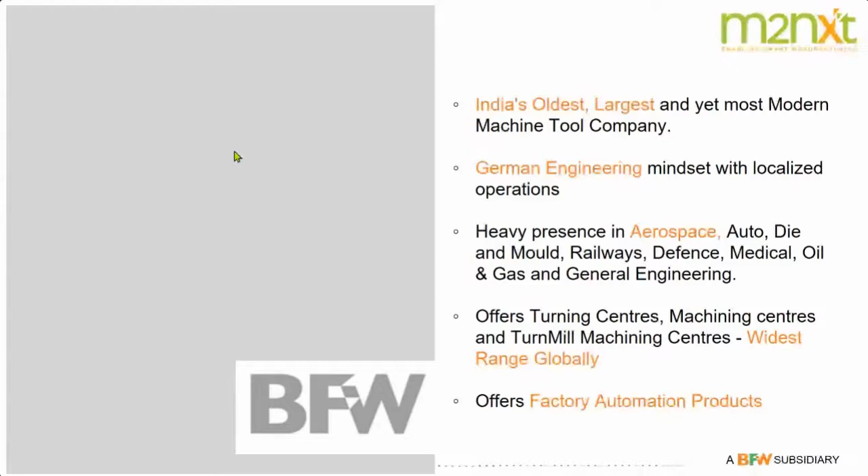We also have started offering factory automation products, which we are going to see today. So what is this M2 NXT, which is enabling smart manufacturing? It's a fully owned subsidiary of BFW focused on Industry 4.0 solutions, offering digital transformation, automation, additive manufacturing, and so on. So the name coined M2 NXT means any equipment on the shop floor which is producing needs to go to the next level in terms of emanating the data from there and see how do we improve the deployed efficiency of that machine or the equipment on the shop floor.

So that is how we said machine to next level, which means that it is machine to next. Short form is M2 NXT. So we simply said any equipment on the shop floor, when we drive it to the next level, it becomes machine to next level. So that is how we coined the name M2 NXT, which we call it as M2 Next.

So what is this Tech Talk? It is a leadership thought platform for bringing the best of technological solutions to the manufacturing fraternity, share knowledge and enable their progress, help connect with the industry thought leaders so that we can start discussing on how do we start working on this subject. So let us take a quick recap on the industrial revolution.

Industry, as most of you will be knowing, but I still would like to give a larger benefit for all the audience, over 800 plus who are present here. 1.0 was purely application of steam power.

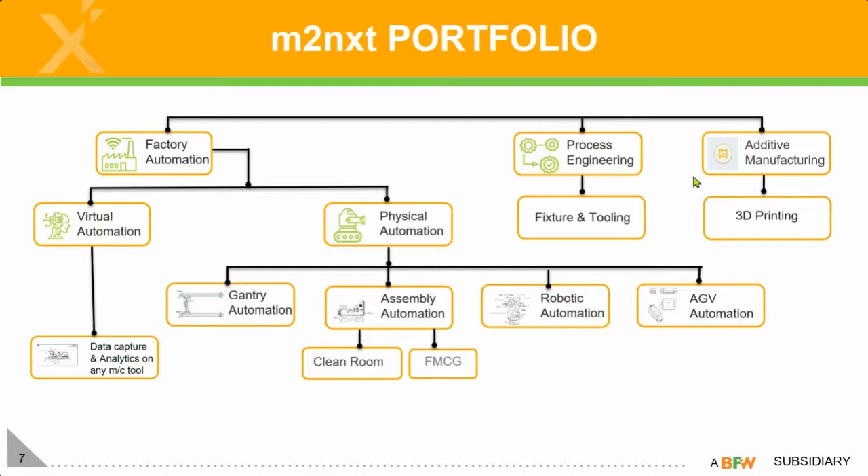So let us start looking at this subject one by one. Now, before going there, let's look at the deliverable capability of M2 Next—you need to have a good team here.

We have a committed team of 50 qualified and experienced professionals in the field of IoT, hardware, software, data analytics, robotics, gantry, assembly, automation, and AGV. We are continuously training them on the latest technologies in all the above fields. We also have professionals for design of automation systems, fixture and tooling, IoT solutions, and 3D printing.

We also have design software like SolidWorks and AutoCAD, and robot simulation software, namely Robot Studio and MotoSim. We have a dedicated project management and execution team consisting of experts for robot, AGV, PLC, IoT, fixture and tooling, and 3D applications. We have a shop floor of 2,000 square meters where project integration, trials, and PDI can be carried out. We also have a tool room facility with necessary machinery.

So this is the team. Unless you have a team in place, it is not possible to deliver the kind of technology we are talking about. So now let's first look at virtual automation—what exactly is the offering with respect to Industry 4.0?

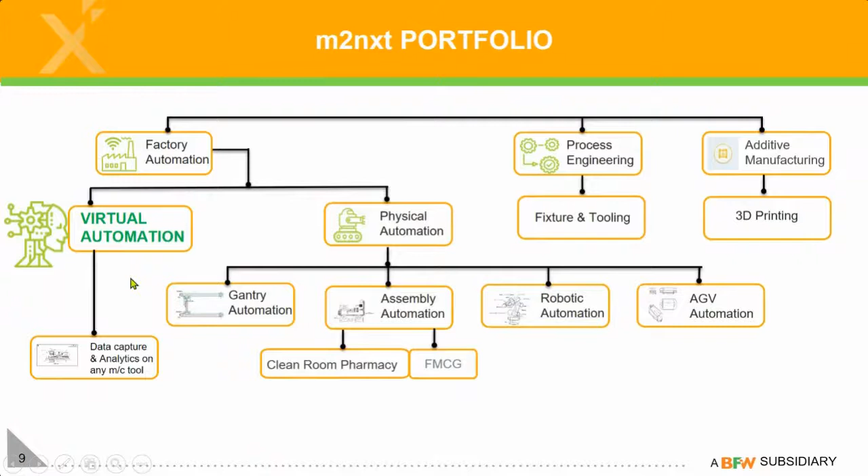We have designed and developed a device called IRIS, which stands for Intelligent, Reliable, Innovative, Seamless. This is a homegrown device which we started in the year 2017 under the Government of India R&D scheme, in the name of Dr.

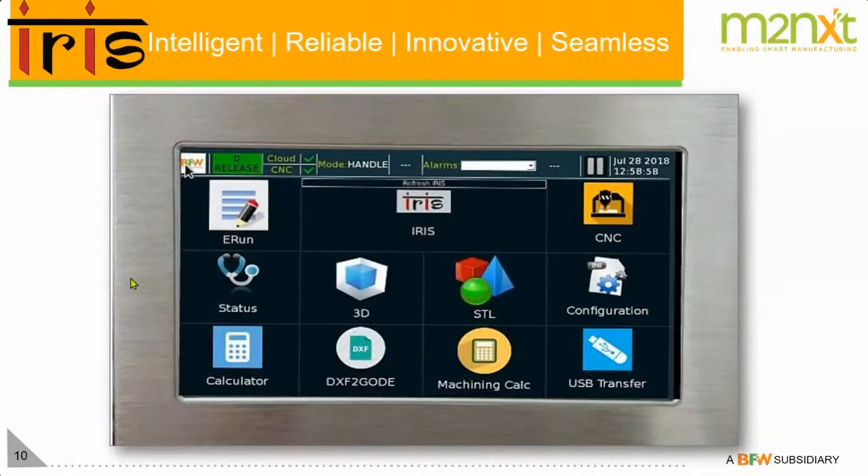At APJ Abdul Kalam Technology Center, we started working on hardware and software, where we have in-house designed this device, which has two variants. The first variant is called IRIS with HMI, which is IP64 compliant in the front and IP20 on the rear, wall mounted with every CNC machine, connected to the CNC controller with a multi-touch screen of 7-inch, 10.1 inch, 15 inch and 21 inch. It has a specification of 4 GB RAM, solid state device of 32 GB, extendable up to 128 GB, with dual Ethernet ports.

We also have a simpler device called IRIS Mini, which is IP20 grade with specifications of 512 MB RAM, solid state device with 4 GB, and dual Ethernet port. Every device like this will go with every equipment, and it will start acquiring data from that equipment and giving reports based on the performance of that equipment.

So let us look at the transactional architecture of this device. The first thing is that this device is not just a passive device like what you see in the market, which just acquires data and starts transmitting it. This device is an intelligent, active device. It not only acquires data, it does data processing, and then data transfer, which means it's an edge computing device that does a lot of processing within its edge process while communicating with the CNC.

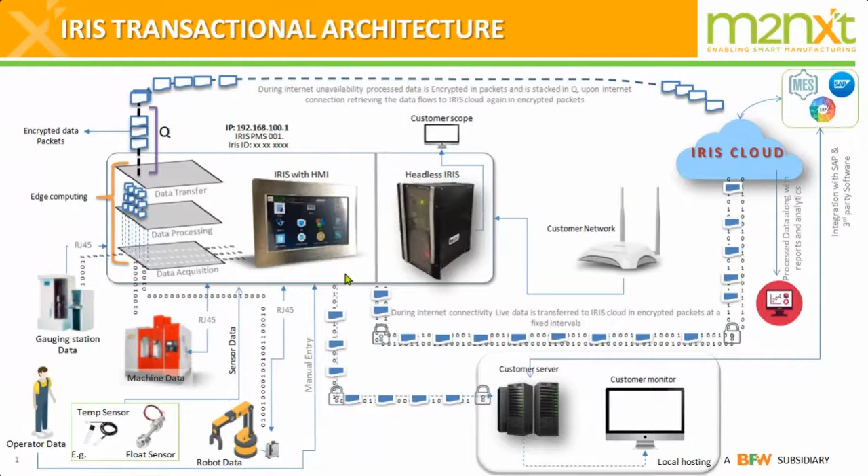So this is the overall architecture. Now let us look at the overview - what are all the modules which this device has got on the shop floor?

The first one is the production management system. The second standard vertical is maintenance management. The third standard vertical is health monitoring. Fourth is the operation management vertical. The fifth is a customized module, which we call data analytics, which is customized to suit the needs of every organization or institution.

Now let us start looking at each one of them, what exactly we have to offer. In production management system, it has got everything to do with production planning. So let us look at how to manage the production plan.

The planner will start making the plan based on the orders received from sales or marketing, for every equipment, for every part, with respect to the setup and the machine. He will go on making the plan - you can see in which plant, what shift, what part, on what setup, with the machine serial number, the work order number has to be established. So he will start making the plan based on the date, the shift, and the number of components.

One can start looking at the plan versus production dynamically on the shop floor for a given machine, which can be dialed or queried from start time to end time, where we see in shift 2, for a work order number on 10th July, from 23rd night 11:30 to morning 7:30.

What was the part name and setup name, what was the target and what was the actual number produced, and how many were okay - in the sense that if there was an automatic gauging station connected to the machine, we can also track the component quality. And what was the target cycle duration and what is the actual cycle duration of this particular machine with respect to the component can be clearly tracked.

Like this, you can start tracking every machine, every shift, every part. And dynamically, you can get to know whether the production plan versus the actual production is in line with the actual desire or not.

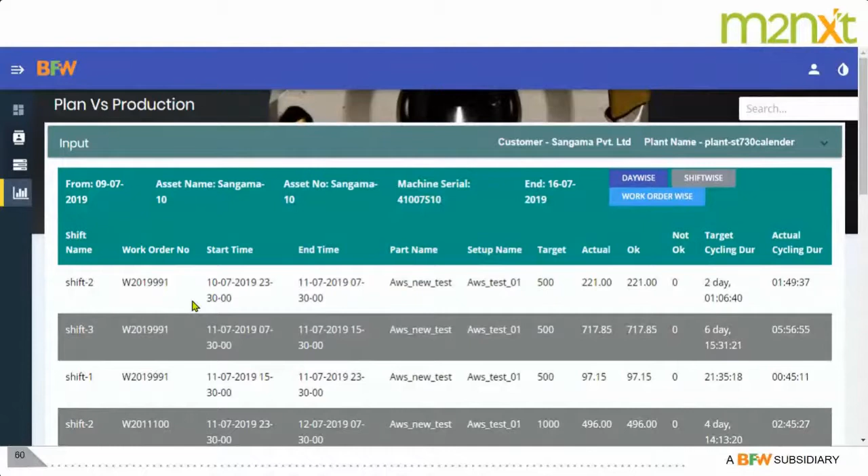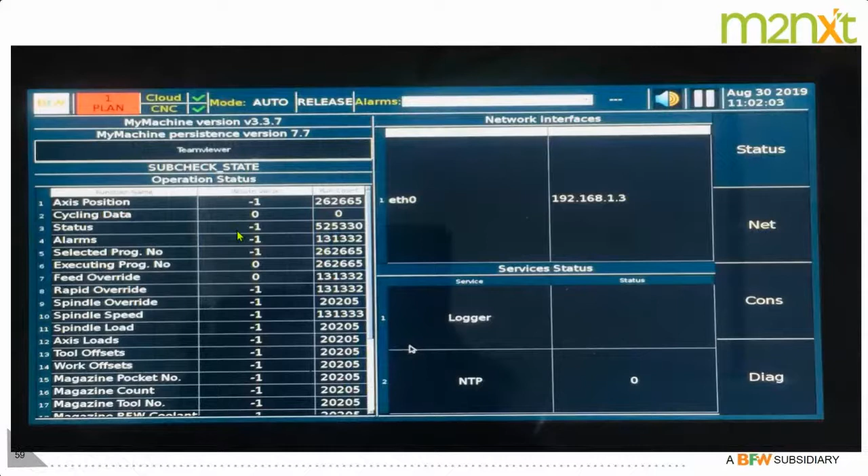You can also look at the live status of every machine on your remote device like a smartphone, mobile, tablet, or laptop, where you can see whether the machine is connected to the cloud and connected to the CNC, in what mode the machine is running - auto mode or manual mode. All the control releases are there, what are the alarms, and what is the real-time date and time.

And what all data is being accessed by the iris with respect to the CNC can be seen, which shows the live status of the machine.

Here you can also dynamically look at the computation of overall equipment efficiency - what was the availability of the machine, what is the performance of the machine, and what is the quality. This essentially means there were no problems on the machine, no issues with consumables, which determines the availability. Performance is when the machine is running with no issues. So if performance and availability are 100%, and quality is 100%, based on these three parameters, you calculate the OEE of the equipment.

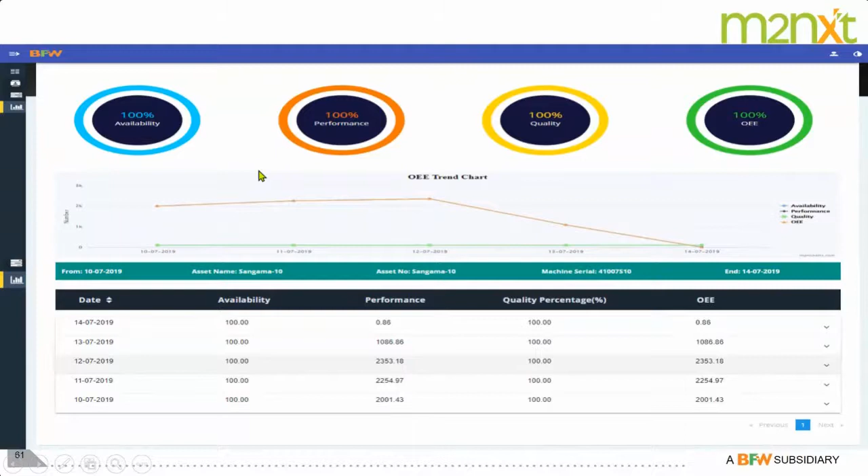So when you have something like 70-80% OEE, you can go back and look from the perspective of availability, performance, and quality, whether there was any shortcoming and how to overcome that. Now, next, let us look at the quality control data.

You can look at every work order number with the number of components you have produced. You can view the quality control status with respect to the parameters: what was checked on the gauging station, what was the result of those, and whether those were very close or well within the limits can be viewed dynamically as and when you produce the component, in the event that the gauging station is connected to either the CNC or the IRIS.

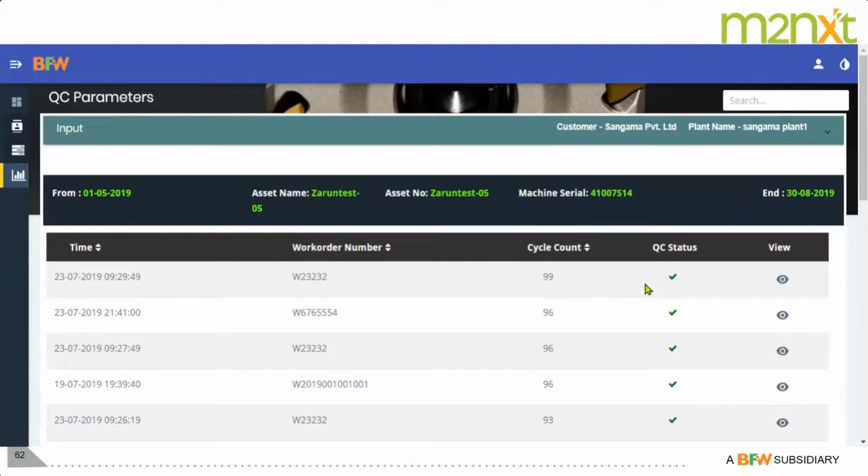One can also look at the feed axis override of the CNC machine status with respect to the part, the date, the shift and the time running for the query, where sometimes the operator can run the machine with the feed axis override above 100% and hence produce the component faster.

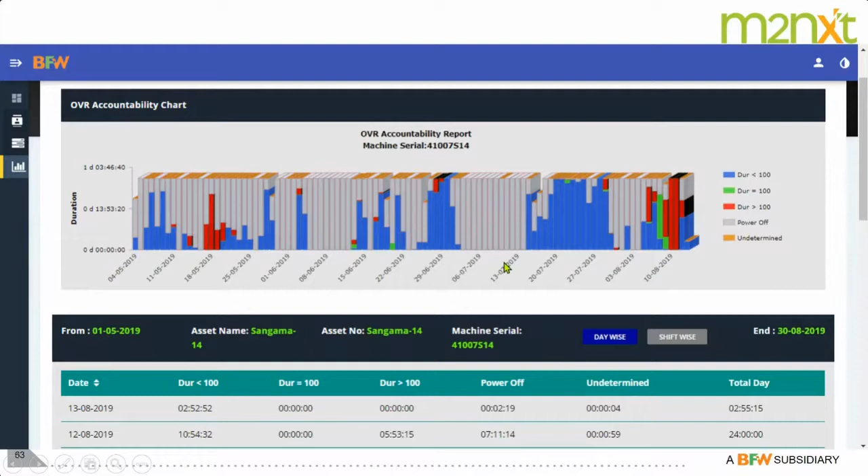So you can start looking at those kinds of traits: if it is blue, it is below 100%. If it is red, it is above 100%. If it is green, it is exactly equal to 100%. And if it is gray, the machine has not produced; it was a power off condition. If the machine is ready and not running and the operator has not intervened for any of the triggers, it becomes undetermined. So like this, you can start tracking the feed axis override status of the machine dynamically on a continuous basis. Now, next we come to the maintenance management module.

So one can start looking at why there were 49 breakdowns, and how many of them were chronic breakdowns can be evaluated. Once you evaluate these chronic breakdowns, you can eliminate them and make the mean time between failure longer, which essentially means that the machine is available for cutting, more productivity. And if you reduce the average time to repair from 1 hour 17 minutes to say 45 minutes, you get 30 minutes on each instance. So 49 breakdowns times 30 minutes is the productivity availability of the machine, and hence the output of the machine can be increased without having to do anything.

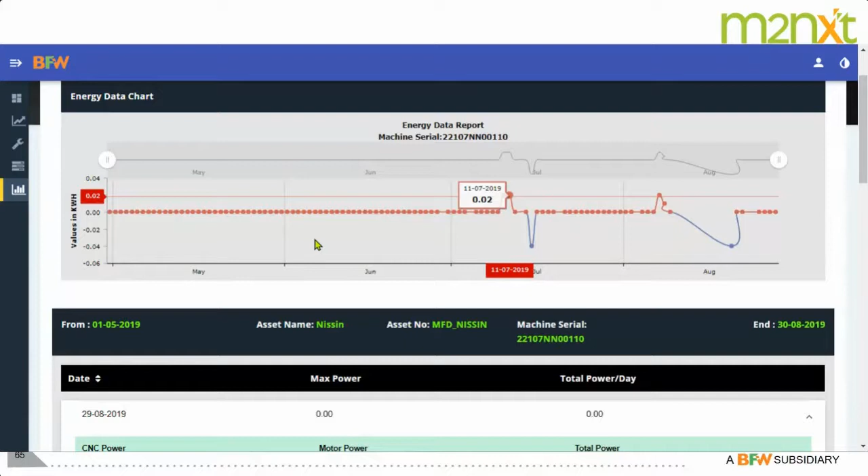Hence, your threshold can come down, and your per unit kilowatt hour pricing also can be revised downwards by looking at how we reduce the power consumption of the equipment on the shop floor.

Now the consumable could be a part, it could be a tool, it could be lubricant, it could be coolant, it could be machine cleaning, it could be anything on the machine which is a consumable. So one can track this, and once you have a waiting time, you can analyze and see how concurrently you can plan this material to be available at the machine so that the machine doesn't wait for the consumable.

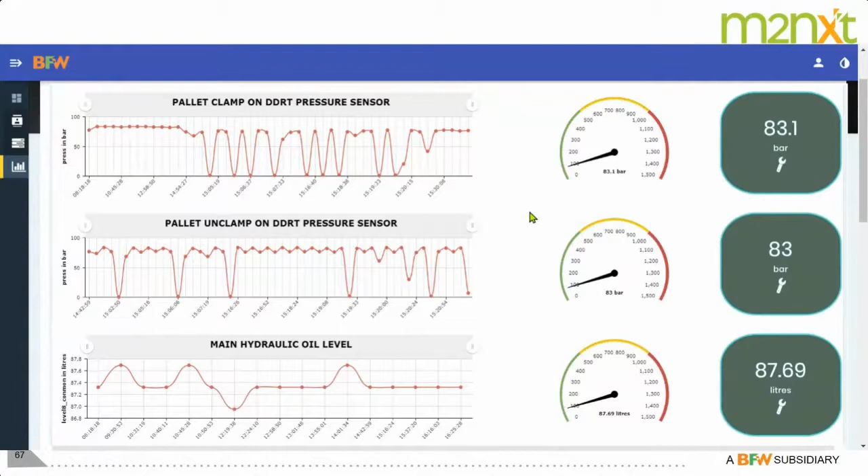Now, we can also look at the machine life and condition monitoring in terms of a dashboard kind of a display where it shows all the sensor and oil levels, which is green, yellow, and red, which shows that if you are in the green zone, you are very safe. So this can be pictorially driven on the dashboard, and this also can be viewed remotely on your mobile or laptop.

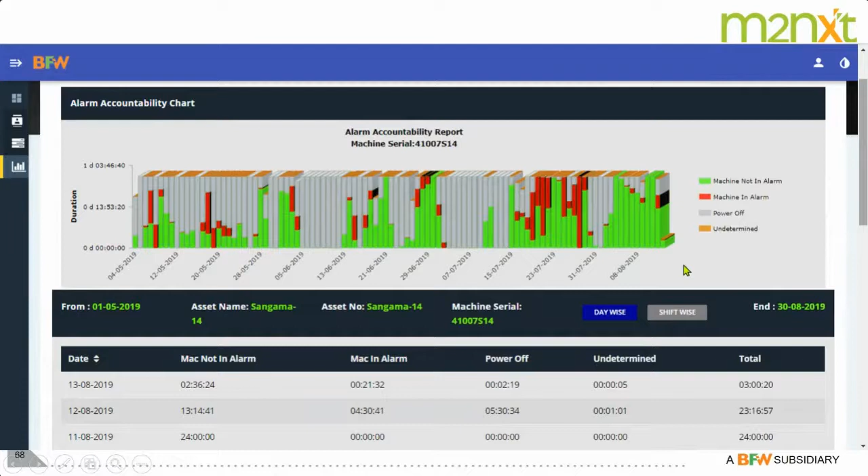Now we next come to the health monitoring system, which is a third vertical, wherein we start tracking the mechanical parameters of the machine too with respect to its performance. So this is a very unique feature which we have done, where the majority of the IoT devices available in the country and the world are only tracking the electronic part of monitoring, and the mechanical parameters are not so easily monitored. Here we are doing it with respect to its usage.

So the first trait is the spindle cartridge, where with respect to the spindle on and off duration in minutes, we track the performance of the spindle by setting the total life of the spindle, and we give a pre-warn condition. If the spindle has a life of 30,000 hours, every 3,000 hours we want to open the spindle and check for bearing wear out, cartridge wear out or the spindle behavior. We can set a pre-warn with the total life, and with respect to spindle on and off, IRIS tracks this from the CNC, and when you reach 3,000 hours, the machine stops.

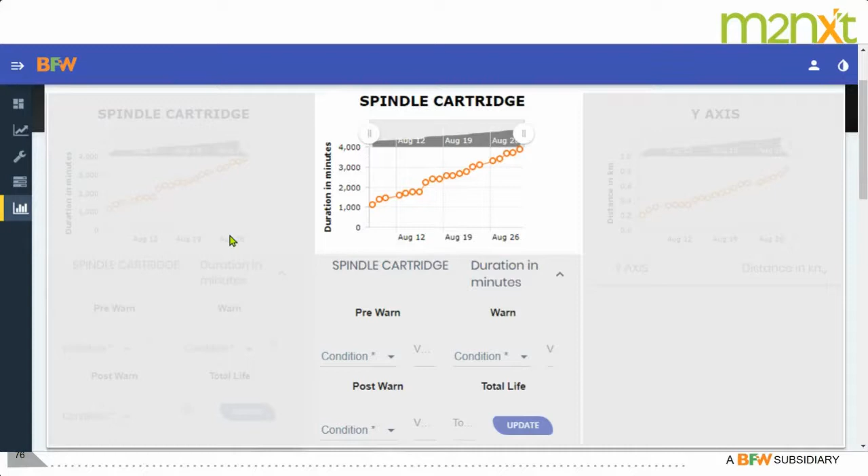One can also look at the ball screw conditions of all the three axes on the machine, X, Y, and Z axis, wherein we give total life and a pre-warn in distance in kilometers moved by the ball screw with respect to time, which again is tracked in real time through the CNC trigger of feed axis or rapid axis movement commanded by the CNC. And based on the pre-warn condition, the machine will stop and maintenance personnel can open and look at the condition of the ball screw with respect to its performance.

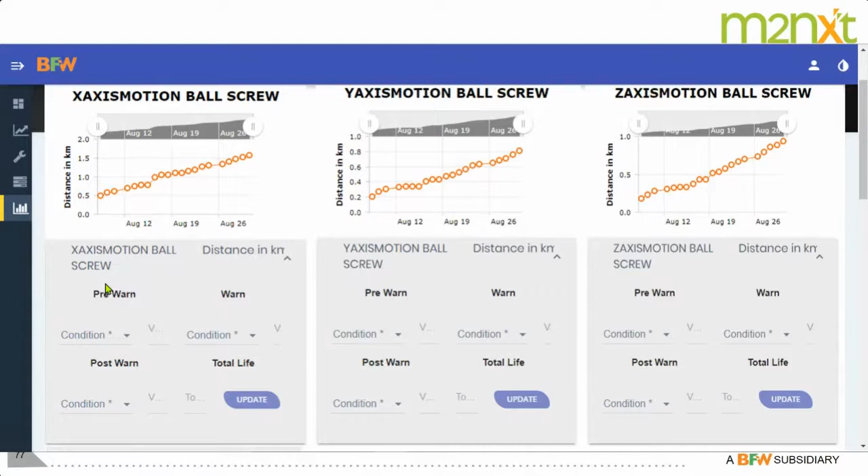So you can go to as many axes as possible on the machine, as IRIS can track the number of axes based on the machine configuration. Similarly, we can also look at the LM guide rails on the machine for wear, like the ball screw, with respect to distance in kilometers and time. You can see the condition of the LM rails of the machine.

One can also look at the hydraulic motor or the induction motor performance based on duration in minutes with respect to time.

It could be a coolant motor, a lubrication motor, a power pack motor, or a chip conveyor motor, depending upon S1 duty, S2 duty, S3 and S4 duty. One can clock the motor's actual running, and based on the time completion, we can stop and check not only the impedance of the motor, but also the actual load, the bearing and so on and so forth.

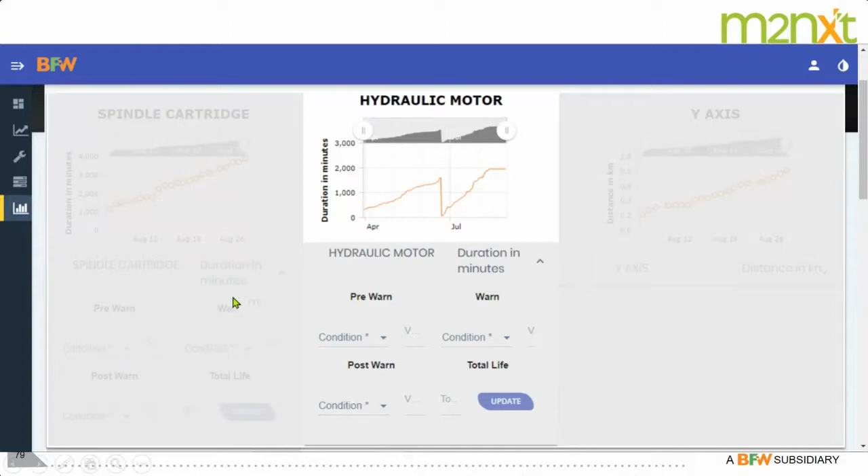We can also track the ATC, the automatic tool changer life of the machining center, like horizontal and vertical machining centers, based on the counts with respect to time. If you have a total life set as 300,000 or 400,000 counts, you can set 10,000 as a pre-warn, and you can open the automatic tool changer and look at the lubrication grease condition. You can look for the cam springs. You can look for cam wear out. A lot of mechanical elements on the ATC to see whether they are normal or abnormal.

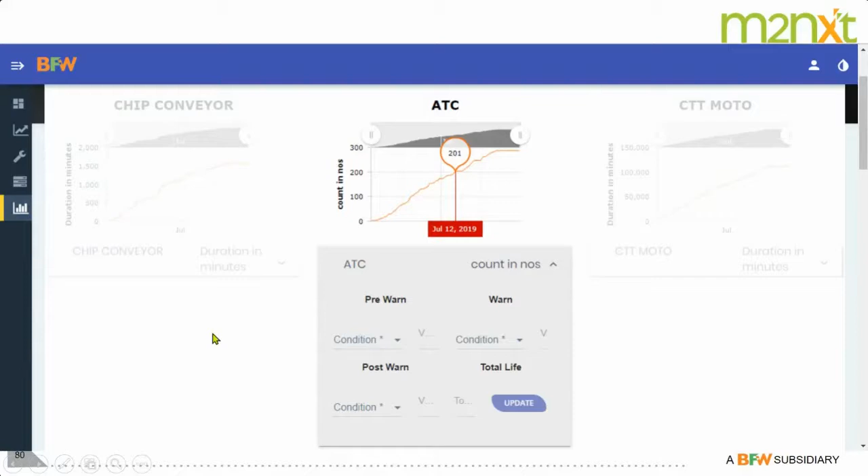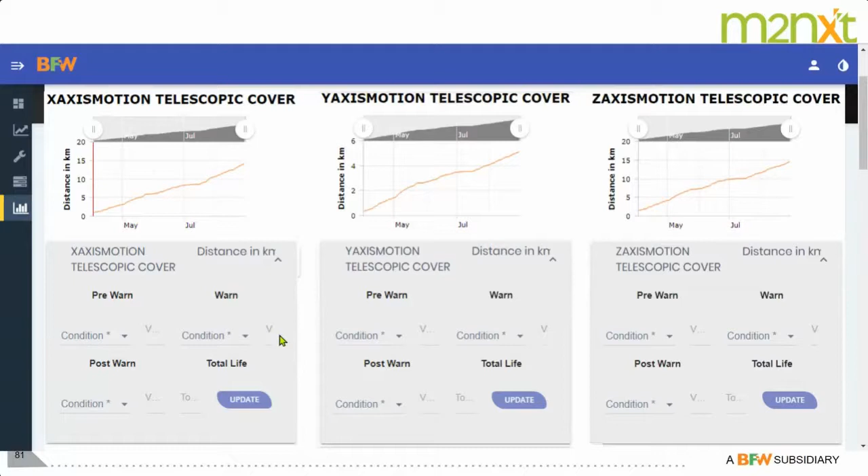Similarly, you can also look at the 3-axis telescopic cover condition of the machine tool with respect to the axis, where we track distance in kilometers with respect to time. Now, the fourth vertical is the one which brings in digitalization and digital transformation on the shop floor, which is the operation management system, which is very important in terms of achieving Industry 4.0.

So the first feature is on-device manual and drawings. Because the system has large memory, you can store all your instruction manuals, all your circuit diagrams, your work instructions, your bill of material, the vendor details, the machine details, the machine configuration, including the inspection and the SQC and SPC sheets in the form of images. And whatever is pertinent to that machine can be stored on the

IRIS. You can start referring to these documents without having to leave the machine by running into the design office and maintenance office, searching for those documents, which are very difficult to trace if you have 150, 200 machines, and the time taken to do so in the eventuality of a failure is very, very long. So here you can give a search command and start looking for those documents.

You can make a clear organization of how the mapping has to be done, so that at every machine, when you search for a document, you know the exact location based on the tree format that can be designed and developed. So here all the manuals, all the documents can be stored. Hence it becomes a paperless factory.

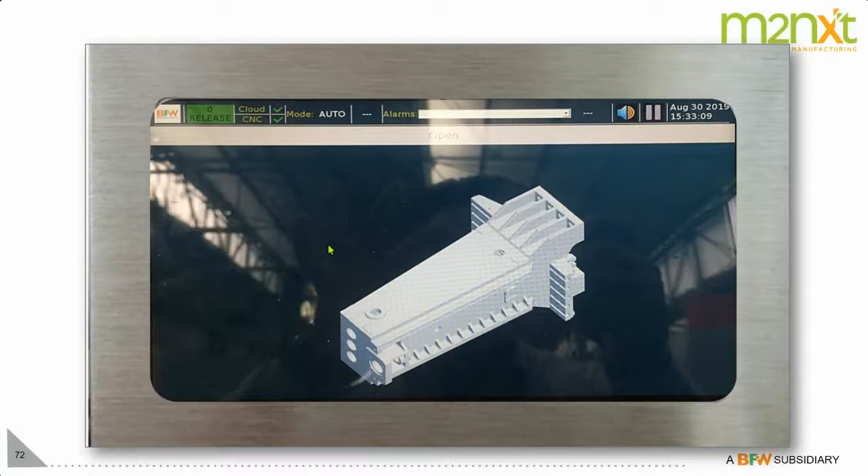Number two, you can also look at the 3D part drawing of parts incoming into the machine and outgoing from the machine, with respect to the control parameters, the contour parameters, the inspection parameters. You can upload it whether it is in Unigraphics, SolidWorks, AutoCAD, whatever software you're using. And since it is a touch screen, you can rotate the object to see it upside down or see the backside of the object. So all this can be done.

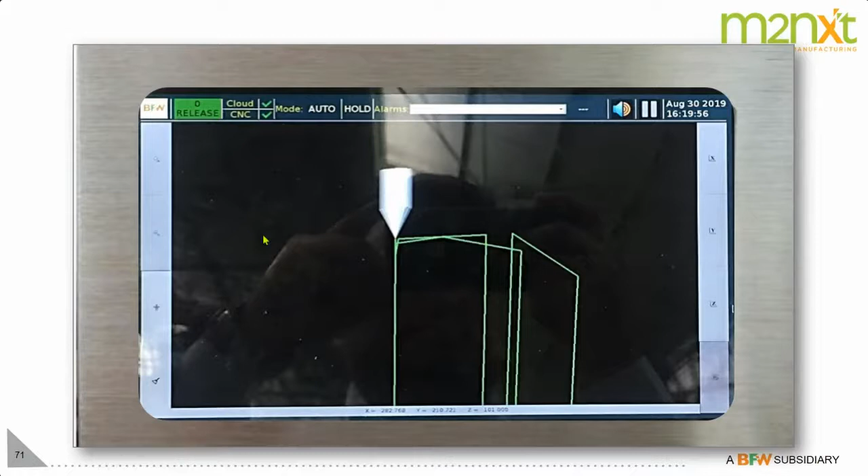If for some reason the machine doesn't have a tool path display, you can use the graphics available on the IRIS, which will show the tool path. You can also do part program editing offline. When the machine is running, you can do part program editing, and you can take a backup copy of that using a USB stick.

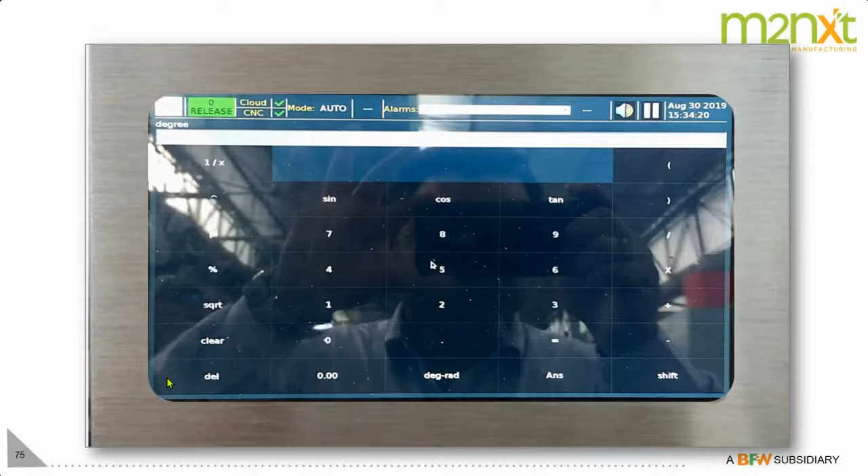We have also given a scientific calculator feature on the device, so that calculations which have to be done by the supervisor while developing the part program can be done without having to carry any peripheral device. So this brings the true paperless factory to the shop floor, and is very efficient in reaching the right document at the right time without wasting too much time.

The fifth vertical is data analytics, where we work depending upon what the reporting requirement should be. So one can bring in customization with respect to the organizational requirement. Next we come to versatile authentication. There are various levels of authentication. The traditional one was user ID and password.

Then came the RFID, and then the biometric. With the current pandemic situation, touching the object, social distancing, and so on, we can also institutionalize a face recognition kind of a thing, where it not only checks the operator to give an interlock to start the machine or not, it can also verify the eye gear, mouth gear, head gear, and ear gear, whether it is in place with respect to safety.

And one can do the skill matrix mapping of each machine with respect to the number of machines on the shop floor and the operator. So with this, you can see how many operators you have with a multi-skill set, and in the eventuality that a critical machine operator is absent due to some emergency, it will automatically pop up to say who is the next operator who should go in for operating that machine without having to check the credentials physically or consult the shop floor supervisor; there is no human intervention required.

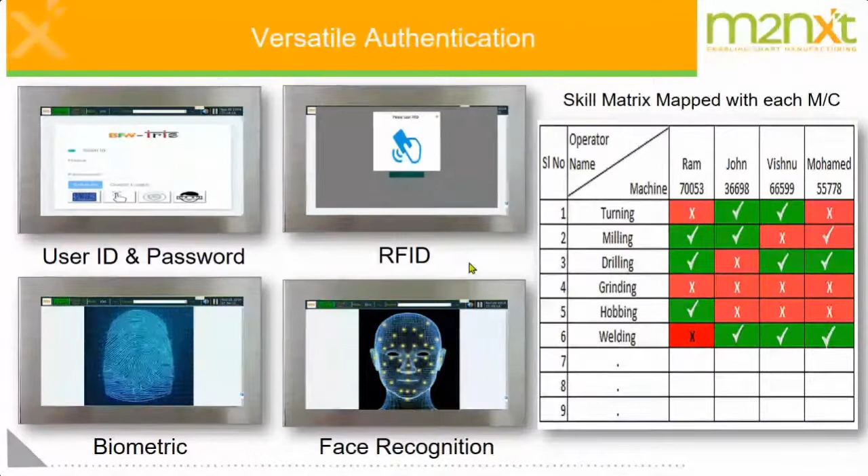You can evolve a skill matrix from this and start automatically upgrading the next operator to run the critical machine, wherein almost no time is lost, because the system can immediately recommend who should be the next person to run that critical machine.

When we come to user management, we have machine operator input and output, we have production supervisor, what he should access and input, maintenance supervisor, what he should access and input. And we also have a management team interface, what kind of reports they would require. This can be further increased depending upon the requirement of the customer, where the user admin at the customer shop floor can configure this simply without m2nxt having to intervene.

So next, what we want to say is that any control, any equipment, any application, we can work on. Of course, we have worked on metal cutting. We have also worked on metal forming, which is laser cutting, turret punch press, power press, press brake, riveting, welding machine interface. We have also worked on metal finishing like powder coating applications,

tracking the efficiency of the plant by doing a signature analysis by measuring the sensors, jig density through the sensor. Here we have done a power press application, working with an impact sensor to see what was the load encountered between the punch and the die of the power press to see whether the component was present or not, as against a mechanical counter which simply says the number of shots.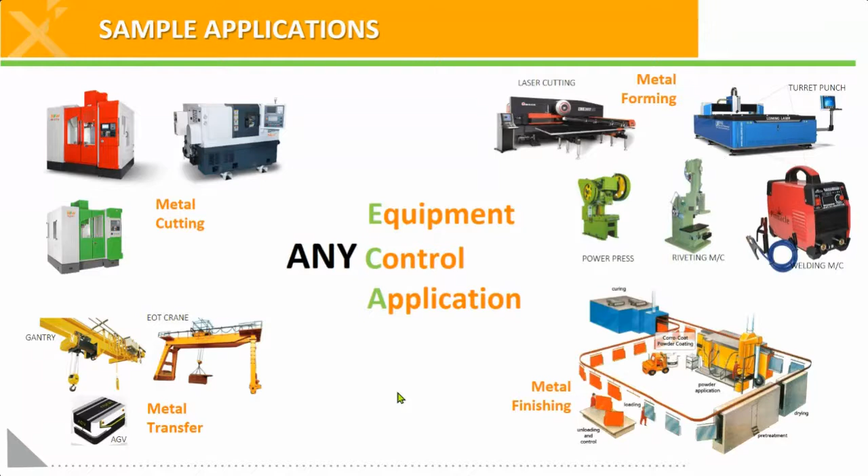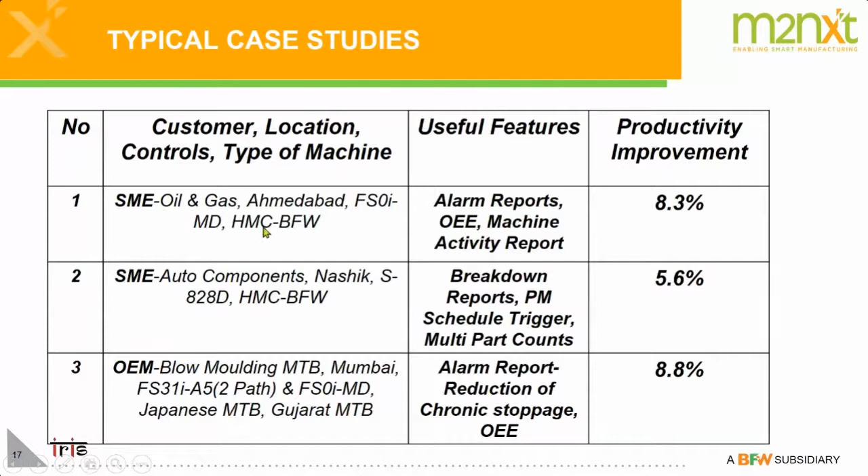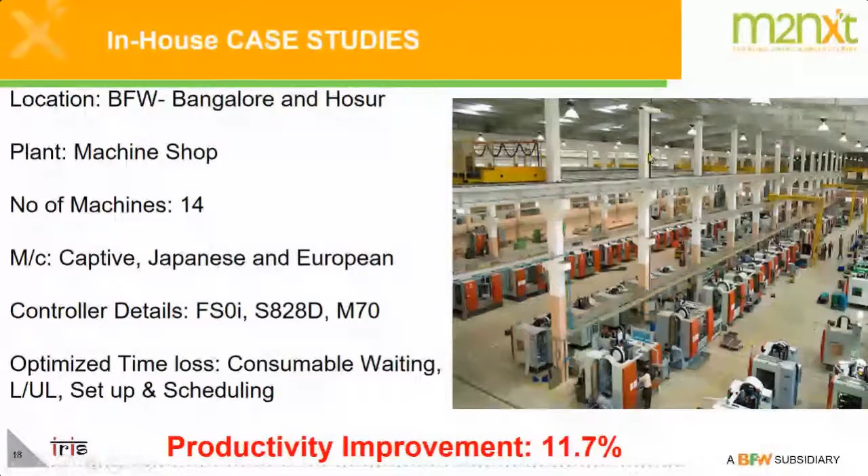Some of the typical case studies: improvement in productivity of 8.3%, 5.6%, 8.8%, from some of the customers in the West. And you can also see the in-house case study we have done in BFW, Bangalore and Hosur, with a machine shop of 14 machines, Japanese and European, which had 0i Fanuc, 828D Siemens and M70 Mitsubishi controllers, where we optimized consumable waiting and setup timing, and the productivity improvement achieved was 11.7% on our own shop floor. This is the BFW shop floor, which you can see in the picture.

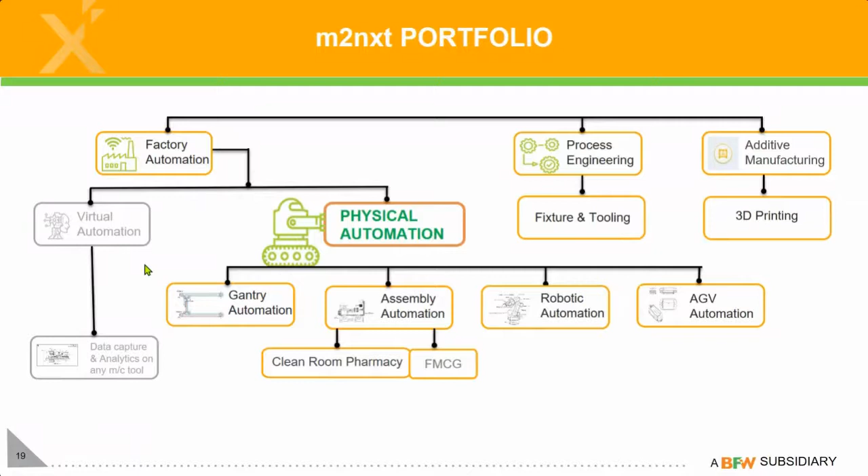Now, once we have acquired and analyzed the data, and found what would be the output from the shop floor, achieving that output from the bottleneck machine, and hence from that shop floor, every shift, every hour, is going to be very challenging unless one is tracking the performance of that bottleneck equipment and the entire shop floor with very strong discipline. So here, the best way to achieve this is to look at automating the critical machine on the shop floor so that sustained productivity can be managed and accomplished.

So we go in for physical automation. So let us look at what we can do in physical automation. First is to improve productivity by maximum utilization of the machine or equipment, to improve performance through improved quality by consistency of the process, predictable and consistent output, to achieve better profitability by reduced dependency on skilled manpower, minimize cost of poor quality, improved cost per component, and better safety for human and equipment.

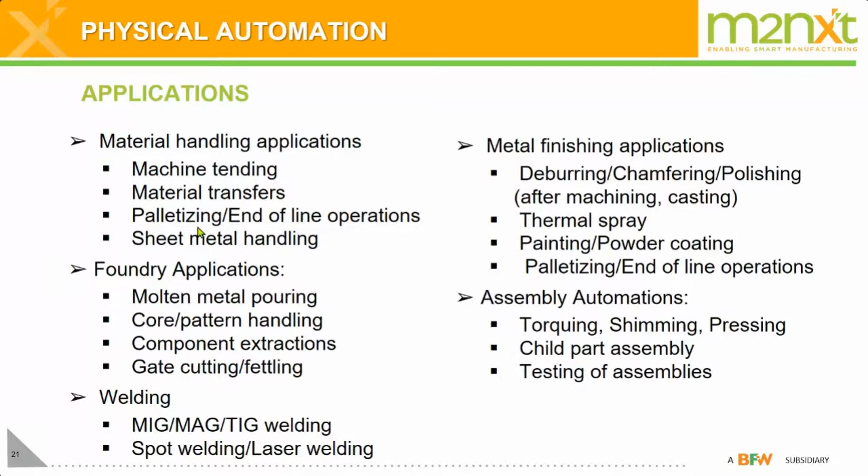The applications m2nxt generally deals with are material handling applications like machine tending, material transfers, palletizing, end-of-line operation, sheet metal handling; foundry applications like molten metal pouring, core pattern handling, component extraction, gate cutting and fettling; in welding, MIG-MAG, TIG welding, spot welding, laser welding; metal finishing applications, deburring, chamfering, polishing, thermal spray, painting, powder coating, palletizing; and in assembly automation, torquing, shimming, pressing, child part assembly, testing of assemblies. So let us look at what technology we use.

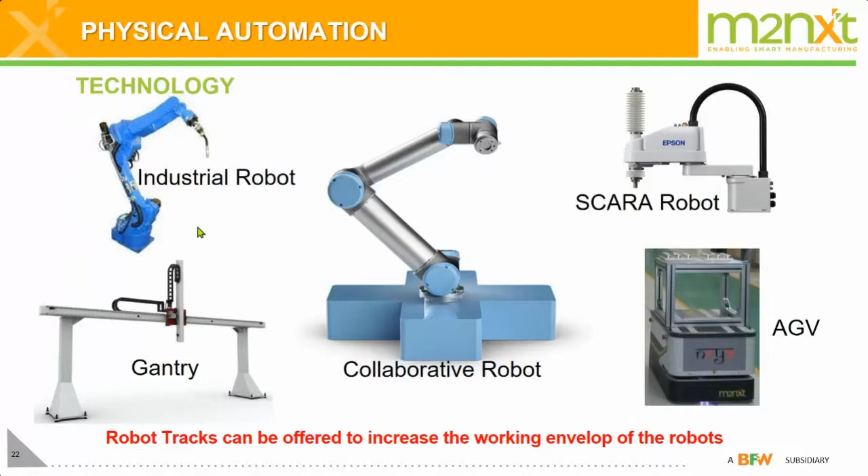We use a 6-axis industrial robot, 2, 3, 4-axis CNC overhead gantry, collaborative robot where the robot and operator can work together, SCARA robot for high-speed pick and place applications like 120 picks per minute, and automated guided vehicle to facilitate movement of material from one machine to another machine, which makes the AGV intelligent and works independently of human intervention.

So let us look at some of the applications which we have done in physical automation using Iris as a device to transfer the data from the gauging station to machine and machine back to robot. So here if you see there is a gauging station. The gauging station measures the component. Whatever is the tool offset correction which is required based on the tool wear, based on the gauging measurement, we transfer that data to the Iris. The Iris will change the tool offset in the CNC machine dynamically. So the next component when it goes for machining, the tool offset is automatically taken care of.

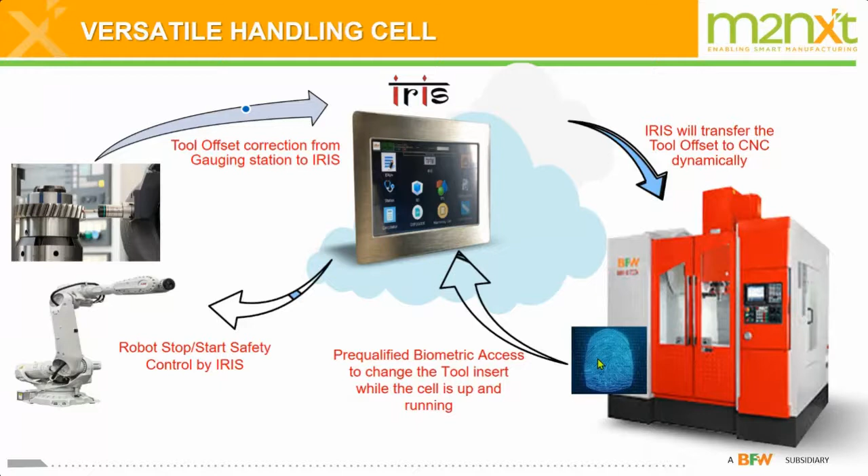And when there is a robot integrated with the machine, when the robot should work and when the robot should stop can be determined using a pre-qualified biometric input, which can be interfaced with the Iris, and the Iris can command the robot controller to start and stop, keeping the safety and the intervention in mind, which is purely an Iris control. So let us look at some of the applications, what exactly we have done.

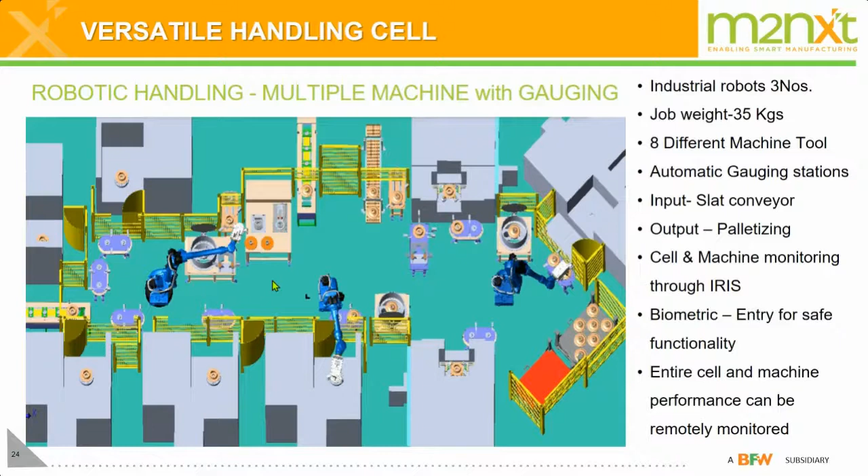So some of the benefits: unmanned cell operation, auto tool offset correction, auto gauging, auto palletizing, all machines and robot cells monitored with individual Iris, seamless data acquisition, optimal OEE, minimal idle time, 73% reduction in skilled manpower, safe operation of the equipment and human, cell access only to pre-authorized persons, and the entire cell can be remotely viewed.

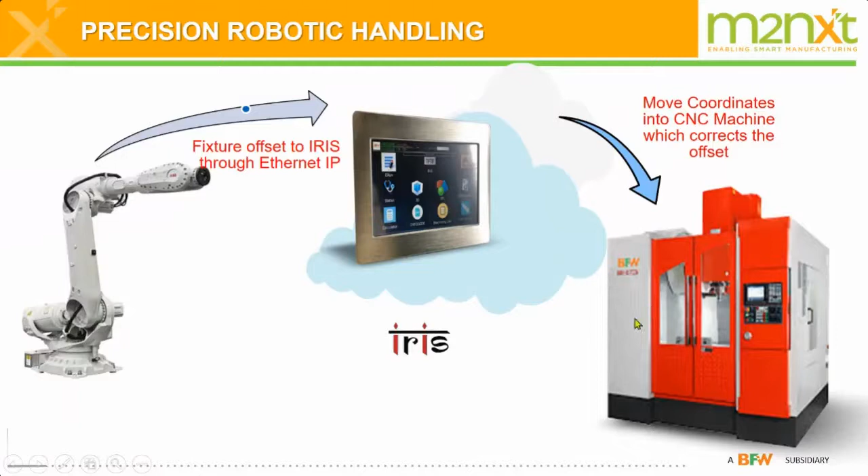Now we come to the next example showing how the robot communicates with the machine through Iris, fixture offset to Iris via Ethernet IP. The robot checks the offset of the fixture by averaging it, and is connected to Iris, where Iris collects this data and sends work coordinates to the CNC machine, which automatically corrects the work offset of the CNC machine itself. Let us look at this example.

There are two horizontal machining centers machining a heavy casting, where we employ a heavy robot with 150 kg payload. This has three end of arm tools with three grippers at 120 degrees. There is an additional tool rack for special tools apart from the ATC on the machine. These are long tools which have to be loaded into the machine spindle at an accuracy of 50 microns. Doing this manually takes a lot of time because the tool is very heavy, weighing up to 30 kgs. It's very difficult for the operator, who must use a hoist, making loading very difficult. The robot can do it quickly, bringing the loading time down by 40%.

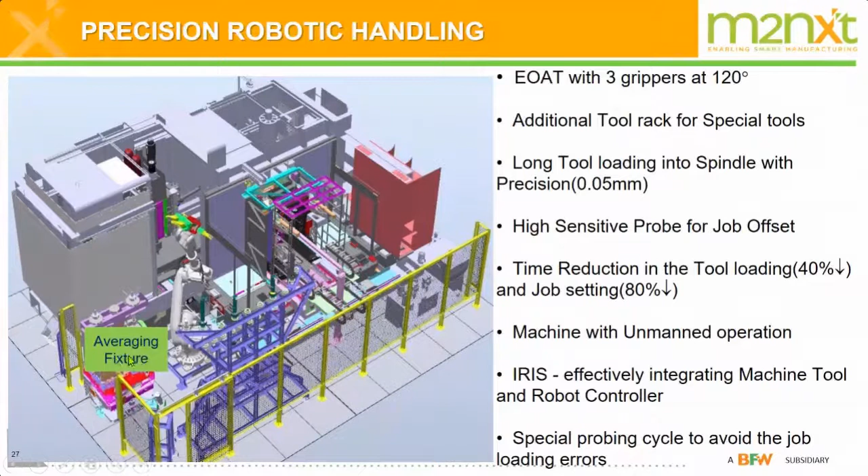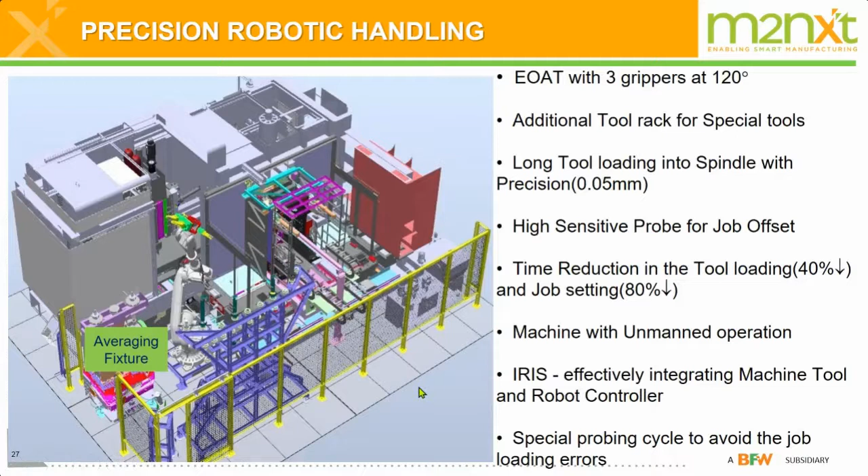The job setting and averaging of the fixture offline while the casting is being machined takes a long cycle time. The robot will pick up the probe from the tool magazine and start averaging the fixture. The moment the averaging is done, the work coordinate that needs to be adjusted on the machine, since this pallet will go on that machine, is automatically transmitted through Iris, connected to the robot controller. This brings down job setting time by 80%, brings ultimate safety to equipment and humans with zero accidents, and as a result expense comes down and downtime is completely eliminated. This is how you take benefit of automation and also use an IoT device like Iris to interface between automation and the machine tool.

Now let us take a quick look at a video showing cobot automation integration, where Iris, the machine tool, cobot, and operator work together - right from the raw component coming in as a bar at the input of the machine, to the finished component coming out. You can witness this in the video. Just take a close observation.

Sir, I can see the video, but the audio is not there, sir.

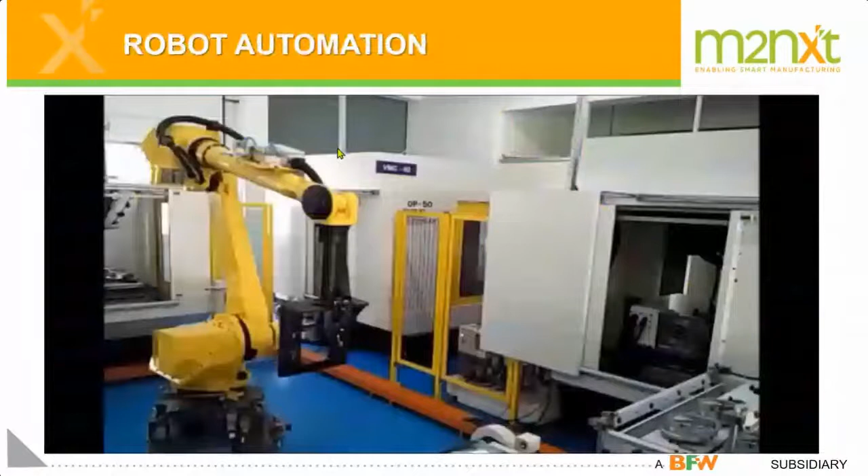Next, let us look at 5-machine integration with one robot, which has a long arm of 3 meters and handles a transmission component from a two-wheeler. This effectively uses the side door of the machine, while the front door is available for the operator to view. Here you can see the robot has a 3-meter reach with a slat input conveyor, where a helper just loads the component.

You can see a vertical machining center with a rotary table where two components are loaded and unloaded at a time. You can also see 180-degree flipping of the component achieved here. The cycle time is about 180 seconds.

This gives a lot of time for the robot to tend to all 5 machines with OP 10, 20, 40, 50 and 70. You will only require a helper to load and unload the component. The input is a slat conveyor and output is a roller. The helper just has to put the component in and take the finished component out, and you need power and raw material to run the cell.

You can see that it's a very efficient way of doing automation.

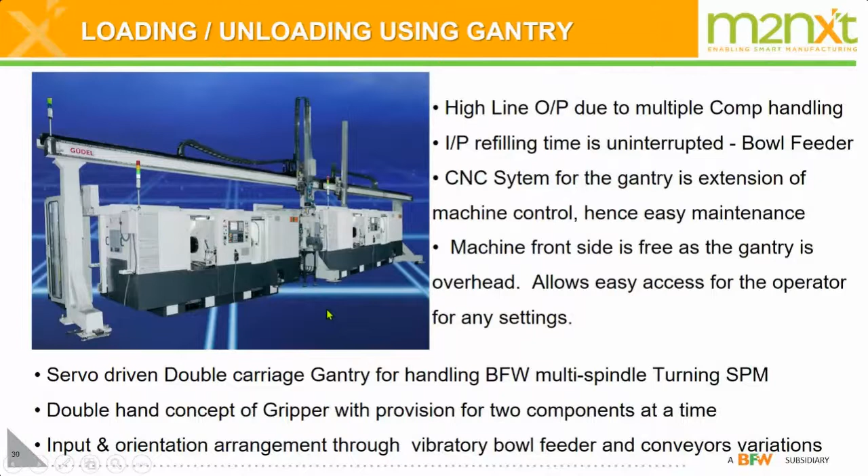Next we come to the gantry, where the gantry enables the part to move from the overhead side. Since BFW builds the machine and the gantry, we use the same CNC system to control the gantry, making it easy for the maintenance person to look at and maintain the equipment with all the user interface available on the CNC MDI. The operator and maintenance person can go around the machine and utilize the complete floor space of the machine tool installed on the shop floor.

Here the averaging of the fixture is done by the machine using a gantry control, which is transferred to the IRIS, and then the IRIS will control the robot to start deburring that particular component with the intelligence of the averaged fixture using the CNC gantry. Since it is a forged component, the variation could be 6 to 8 millimeters for the same component batch, which makes it very difficult for the robot to ascertain the starting point.

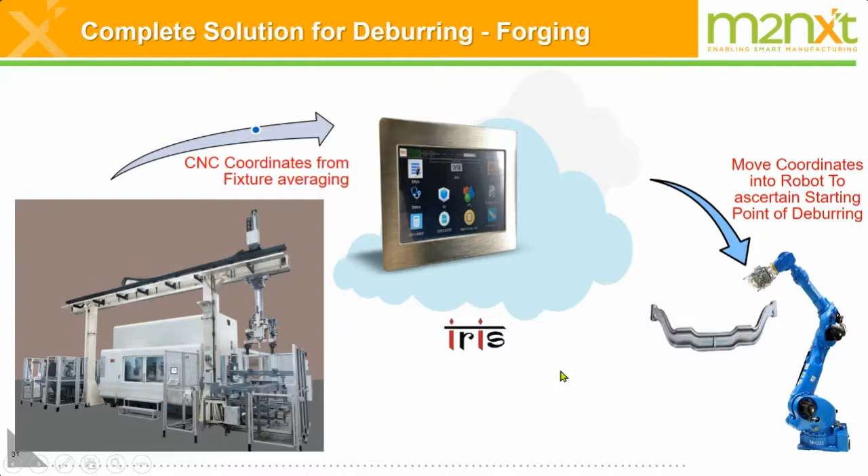With the averaging mechanism and transferring of the coordinate, the robot can become intelligent in looking at that position. The deburring is done with a compliance arrangement, giving consistent product quality and accommodating large forging deviations with the highest safety standards for the machine and the workforce.

So let us take a look at this video.

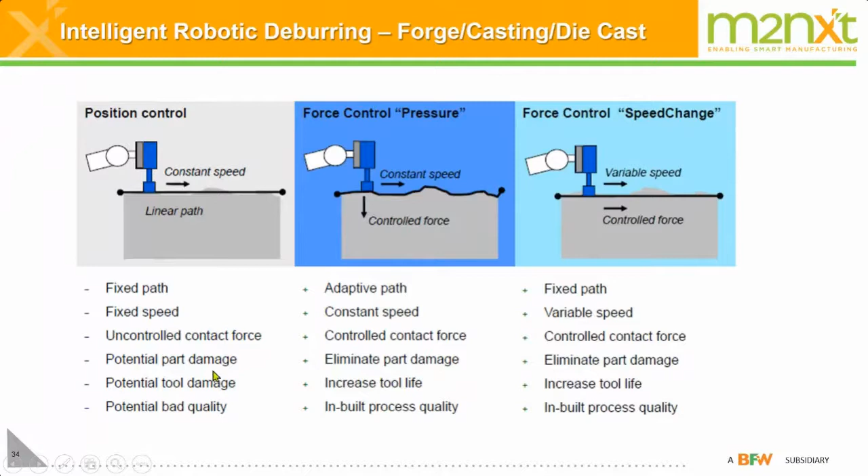There's an extension called intelligent robotic deburring, where we apply force control as a parameter to check the pressure and speed change at the end of arm tool. By bringing in a controlled contact force, changing the path and speed with respect to adaptive path and constant speed, or fixed path and variable speed, potential part damage can be eliminated, tool life increased, and process quality built in. This is achieved by putting a force sensor at the end of arm tool.

The force sensor comes in 3 variants: 15 Newton meter, 60 Newton meter, and 400 Newton meter, depending on the stock to be deburred on the component and the force and thrust required. You can choose that particular sensor on the given robot, which has the capability to sense.

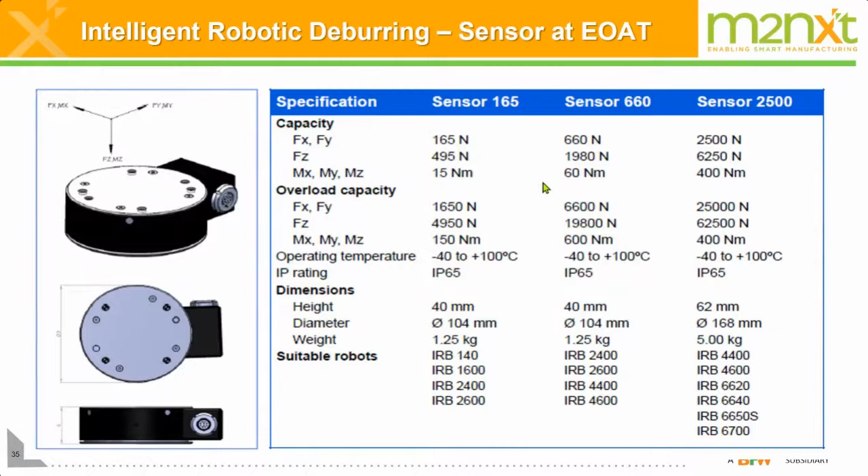As a result, you can start monitoring the performance of deburring, just like a human hand, wherein the back thrust can be easily sensed, and accordingly the speed and feed can be changed. This is how intelligent robotic deburring can be achieved going forward.

Now let us take a quick look at the automation application of robotic ladling, where molten aluminum metal is picked from the foundry using a crucible. The crucible has a thermistor which monitors the temperature of the metal being picked up, and it has to pour within the stipulated parameter time. Pouring is a controlled process, using the extended axis of the robot, which controls the ladle to pour into the gravity die casting machine.

As a result, porosity comes down substantially, and rejections were brought down by 90%. The efficiency of the entire cell improved dramatically because there is no human involved, since this was a very tough and fatiguing operation for an operator to do, which is not recommended. But 24/7 this cell can run as long as raw material and power are available.

So let us take a look at this video.

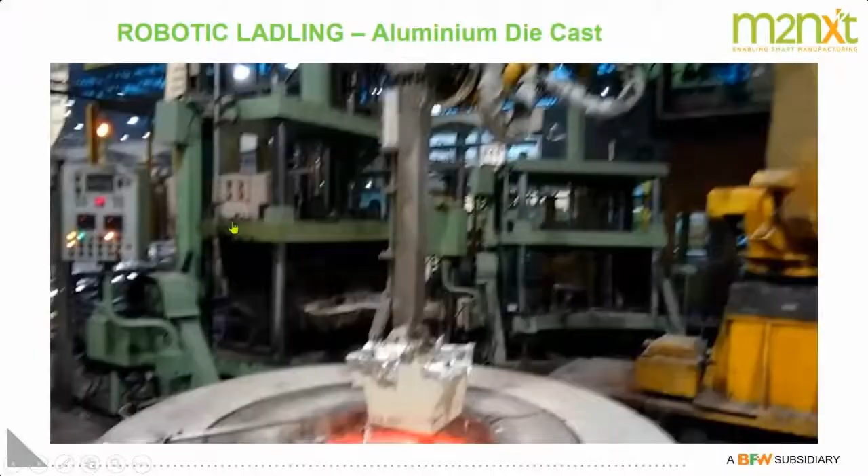Next, let us look at the automated guided vehicle, which was designed and developed in-house by M2NXT, launched in March 2020. The key elements are from Europe, which is gearbox and servo. Navigation mechanisms available are SLAM, inductive RFID type, and optical RFID type. Safety sensors and PLC are included, and we use lead crystal battery for sustained backup and long life.

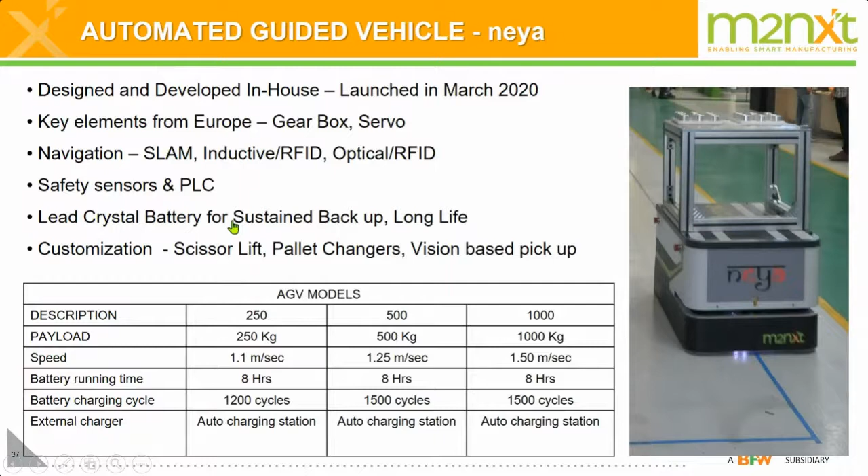We can do customization like scissor lift, pallet changers, and vision-based pickup of the AGV. We have 3 models right now developed: 250 kg, 500 kg, and 1 ton payload. It also has auto charging capability, where once the battery threshold goes below a certain level, the AGV will go to the charging station and start getting charged.

So let us take a quick look at this video, which shows the AGV can move between machine tools, carrying the raw material and the finished material.

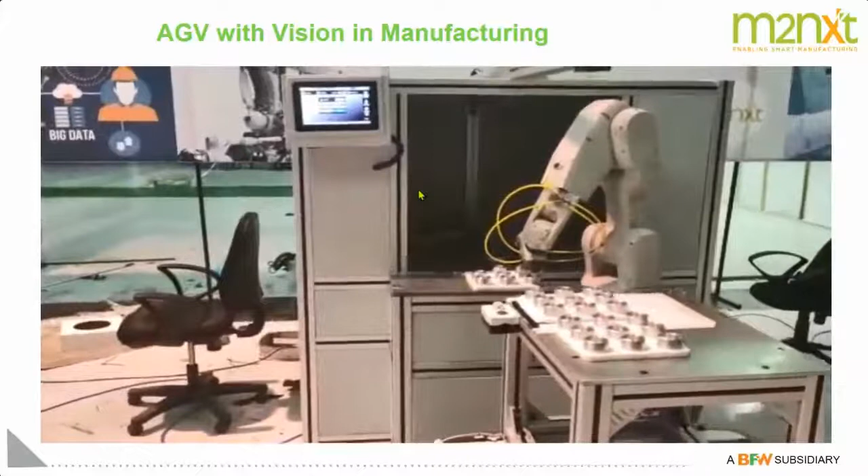The raw material, the pre-processed material can go to that station, and the finished material can come back. This can be a local station with a robot working with a critical machine, or an operator working on a normal machine.

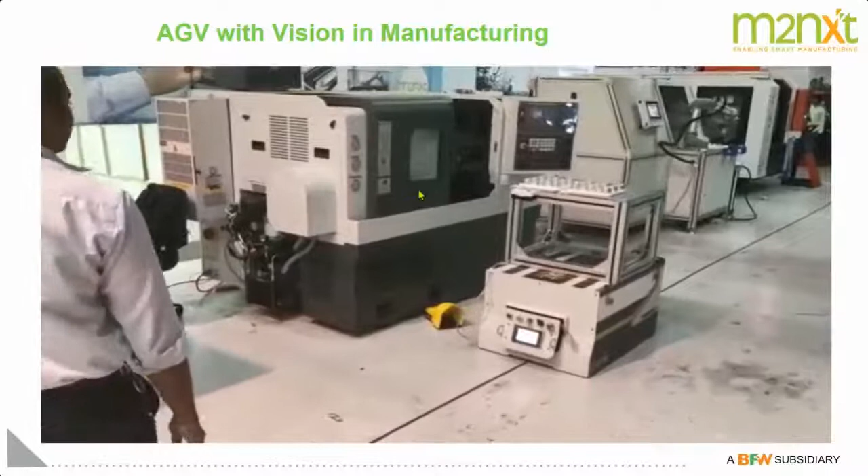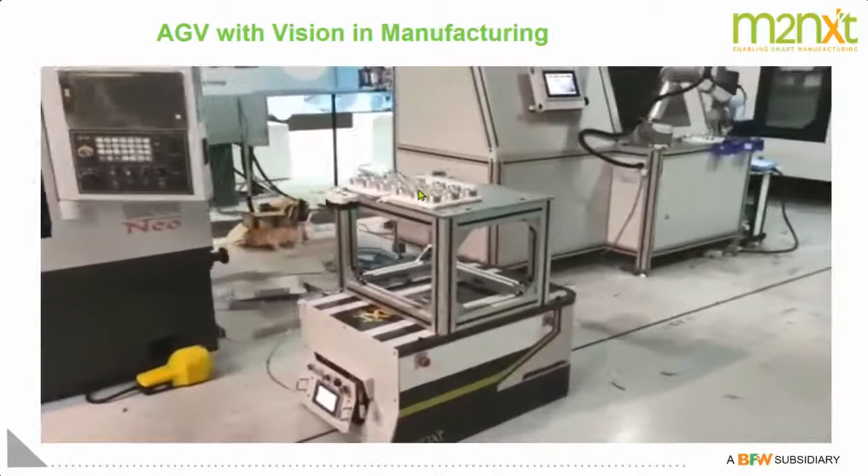So the AGV can communicate not only with the machine and the robot, it can also communicate with the operator by pressing an acknowledge button to say that the component was picked up and completed. So without altering the shop floor layout, one can envisage an AGV bringing in material at an interval depending upon the throughput of the shop.

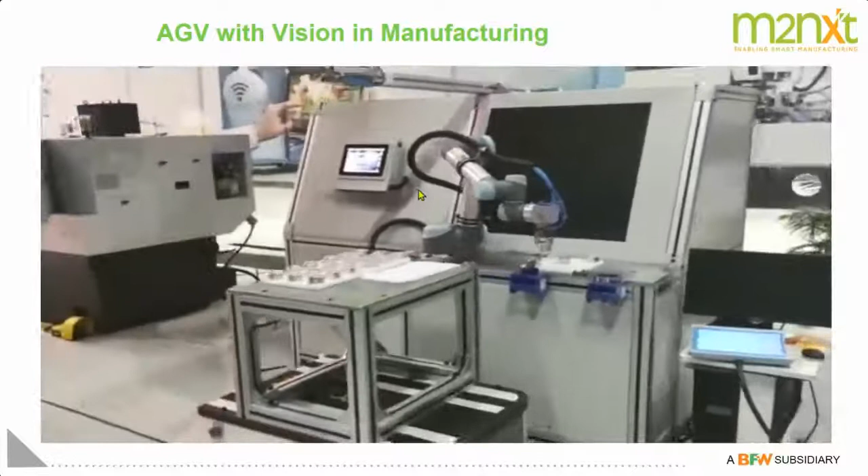And wherever there are critical machines, the robot will handle that particular equipment using vision or position or whatever mechanism is required, depending on the criticality of the component being carried by the AGV. Here you can see there is a camera looking at the component, which will prompt the robot to meet that coordinate and pick up the material from that station automatically.

So this is how one can employ multiple AGVs on the shop floor if the throughput is within 30, 40, or 50 seconds, or increase the pallet size by number of raw components so that material movement can be synchronized with respect to the cycle time on the shop floor.

The beauty is that tomorrow if the component changes for whatever reason, only the jig and the end-of-arm tool has to change on the robot. Number two, the shop floor layout need not be changed depending on the current setup.

The AGV can take a 90-degree turn, go forward or reverse. It also has an ability with the laser scanner to be very safe, where the AGV will start and stop automatically when there is an interference.

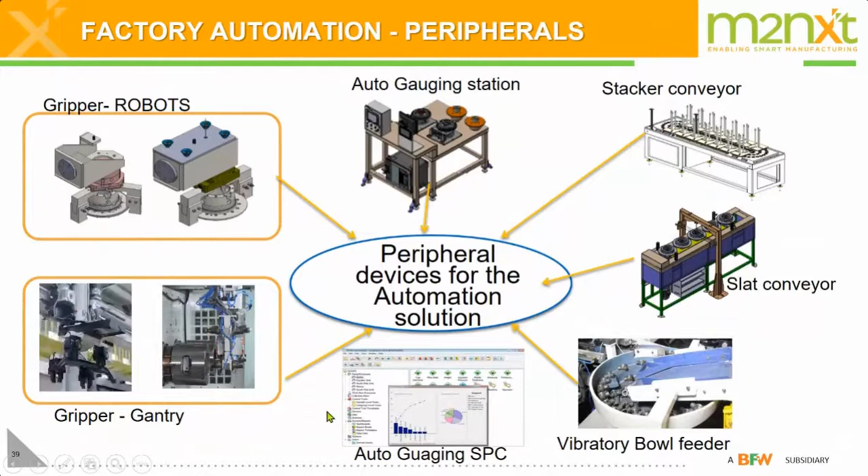Now, some of the elements which we design and develop: gantry, gripper for gantry, gripper for robots, auto gauging station, stacker conveyor, slat conveyor, vibratory bowl feeder, and auto gauging SPC. We can design and develop this. We can also design and develop the traditional HMI and a GUI kind of HMI. So that ends the physical automation.

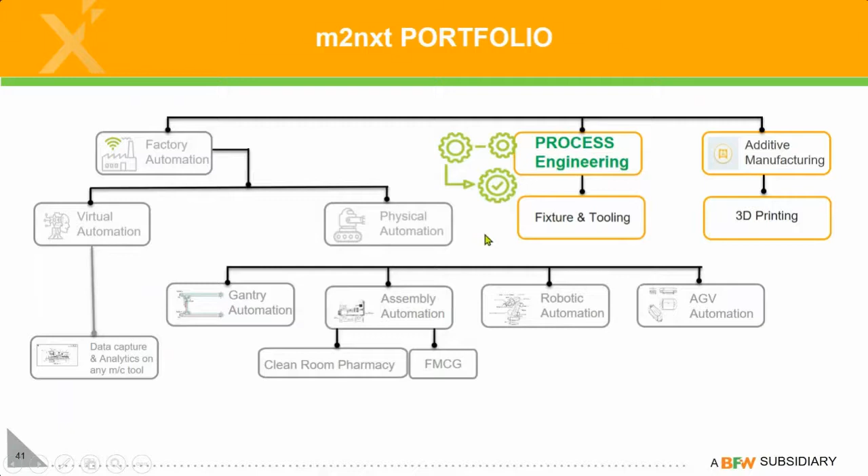Once we have acquired the data and championed the output data by doing physical automation, the process engineering to improve the performance of the existing machine comes into picture, which is nothing but looking at fixture and tooling. So m2nxt supports the customer as a total solution provider.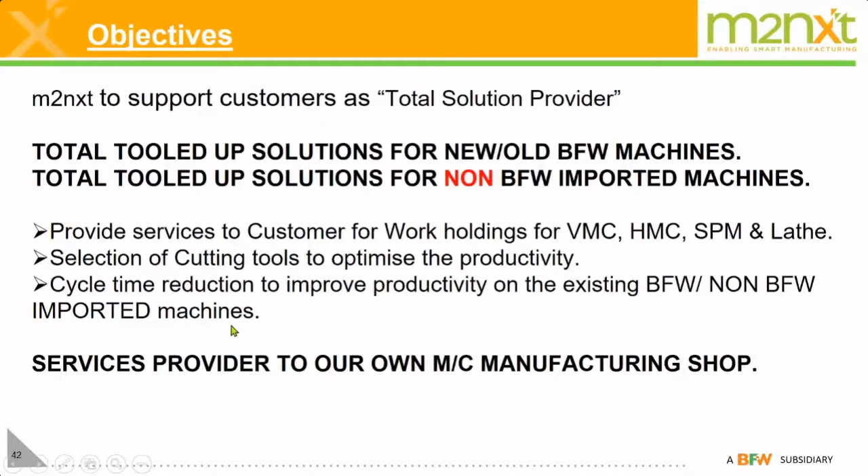We work on total tooled-up solutions for new and old machines, as well as non-BFW imported machines. We provide complete service for work holding for VMC, HMC, SPM, selection of cutting tools to optimize productivity, and cycle time reduction to improve productivity on existing BFW and non-BFW imported machines.

So our responsibility starts from looking at the dimension, geometry, surface, job history, and machine details, working out the process flow diagram, cycle time estimation, and selection and procurement of tools and accessories.

We also do design and manufacturing of fixtures, validation of all the above with the internal team and customer, and forward the complete project to our application team. So we have an advantage because we do everything in-house, and as a result, the lead time is reduced and the cost is very, very important.

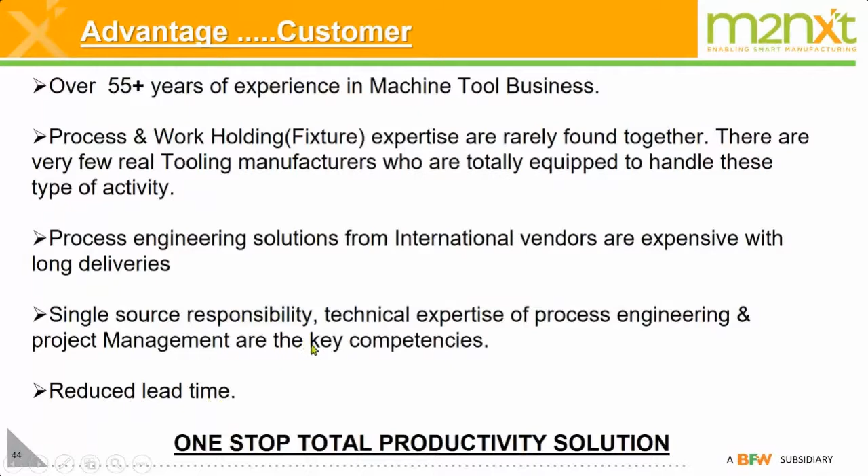So some of the fixture modifications we have done for BS4 to BS6, which is an old 8-year-old BFW machine, where we have done a hydraulically operated fixture, which was commissioned and proved out in 2020.

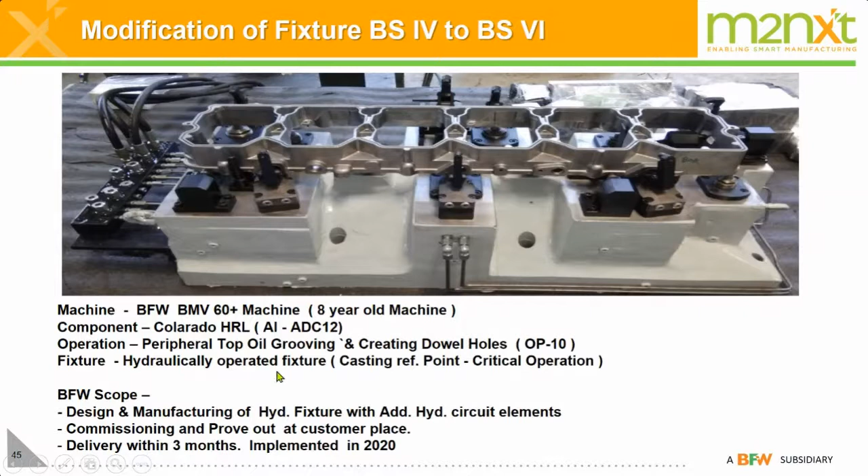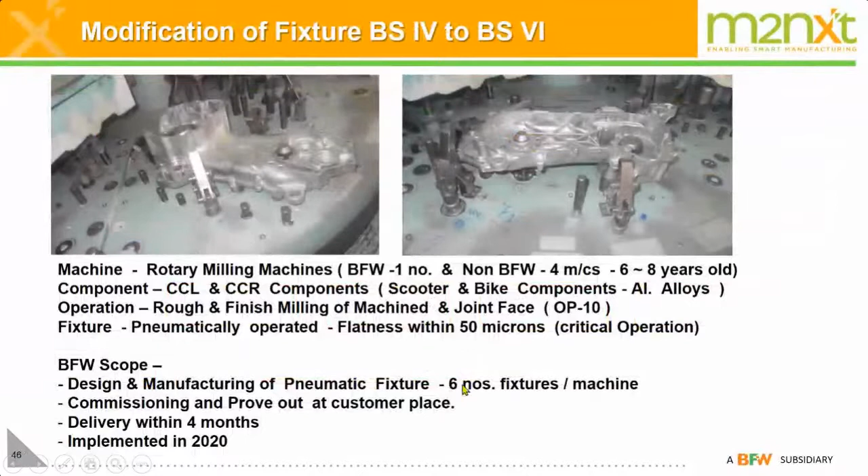We also did a BS4 to BS6 conversion of crankcase left and right components of scooter and bike for the number one two-wheeler company in the country, where the flatness was 50 microns on the pneumatically operated fixture, which was very, very crucial. We designed something like 30 fixtures and delivered it within 4 months in the year 2020.

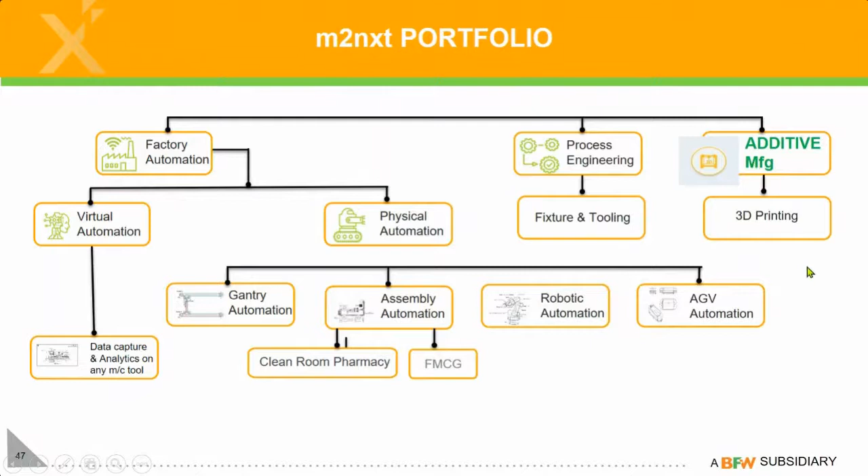Now, once we have done this, the last part comes is the additive manufacturing. Let us look at what it is. So m2nxt offers complete solutions to additive along with subtractive manufacturing.

We are currently working on industrial polymer, and we'll come up with metal by the end of year 2020. We have experts at m2nxt ready to work with you to offer solutions to overcome your shop floor challenges, adapting additive in all our automation and process engineering needs. So Stratasys signed an agreement this year with m2nxt as technical partner for the India market.

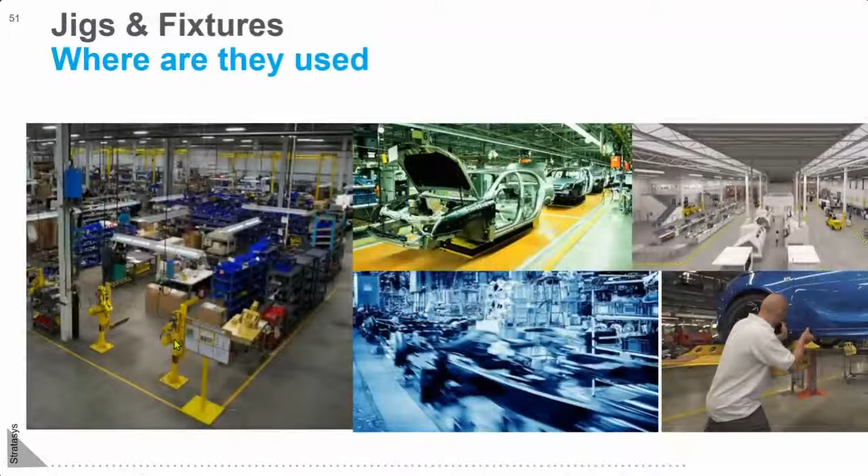So let us look at what is the additive manufacturing application on the shop floor. Something like jigs and fixtures is where they're used. Typically, this is the shop floor where you will see a lot of subtractive manufacturing happening with a lot of logistic movement, tooling, and kind of things.

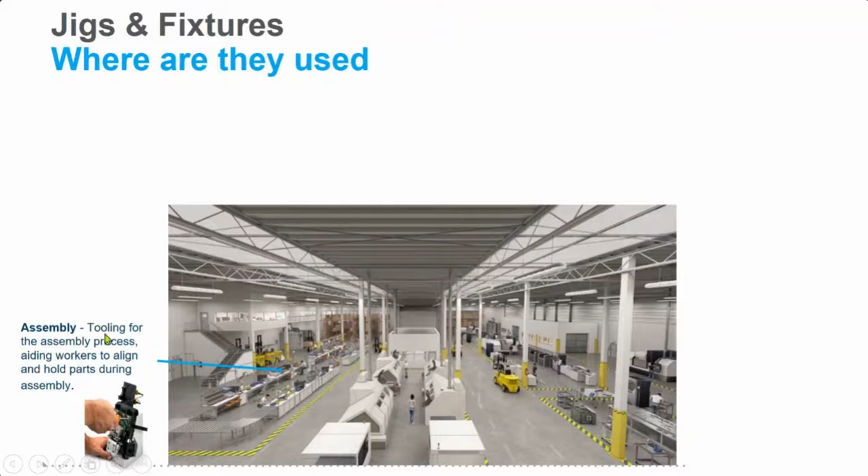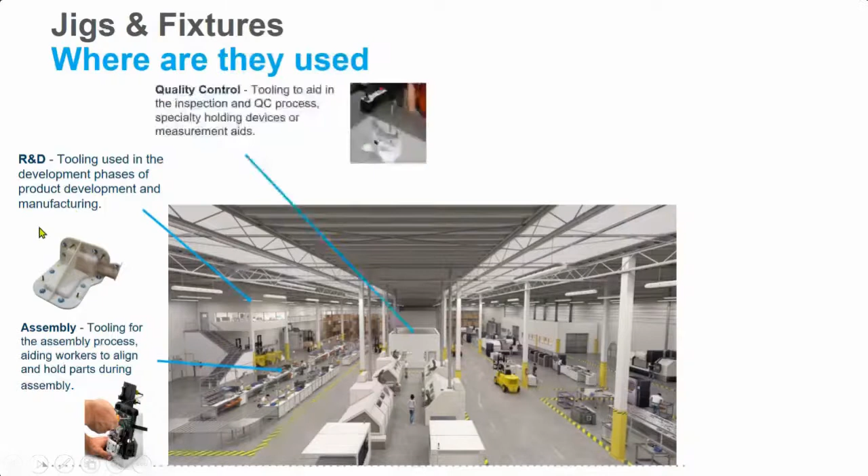So the first thing is assembly tooling for the assembly process, aiding workers to align and hold the parts during assembly. Next is R&D, where tooling is used in the development phases of product development and manufacturing. Next is quality control tooling to aid in the inspection and QC process, specialty holding devices or measurement aids.

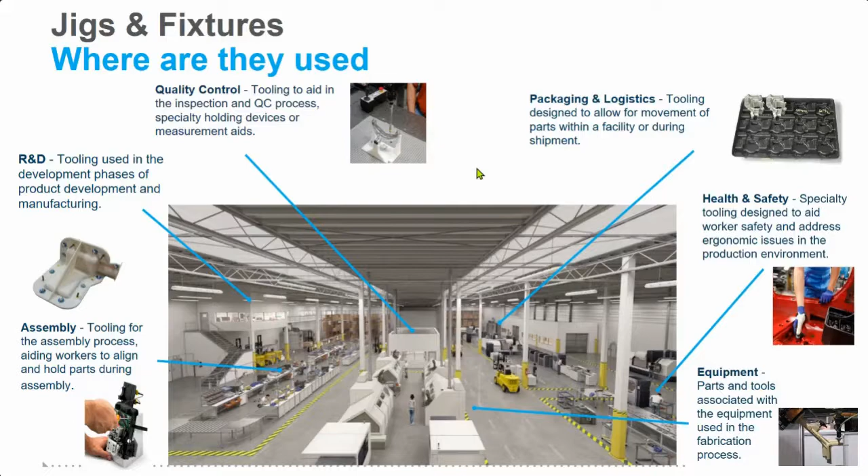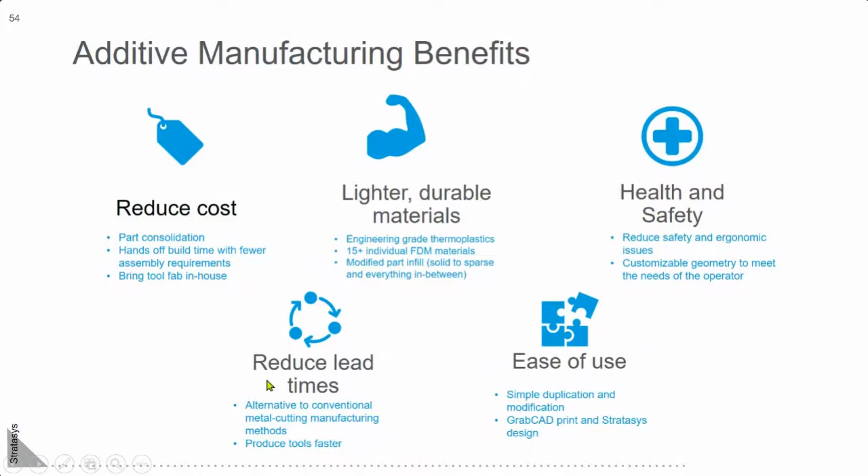So some of the applications which one can see on the shop floor using FDM and industrial polymer are check tools for go/no-go gauges, inspection fixtures, kitting trays, alignment fixtures, drill guides, end of arm tooling in robots and gantries, ergonomic aids, safety guards, tool organizers, masking fixtures. So the main advantage is that you can do color coding, it is non-abrasive, it is durable, it is highly customizable to product and operator, lightweight, easily manufacturable, moderate tolerances. So with this, there is plenty of benefit which one can achieve and do away with the traditional style of manufacturing and its disadvantages.

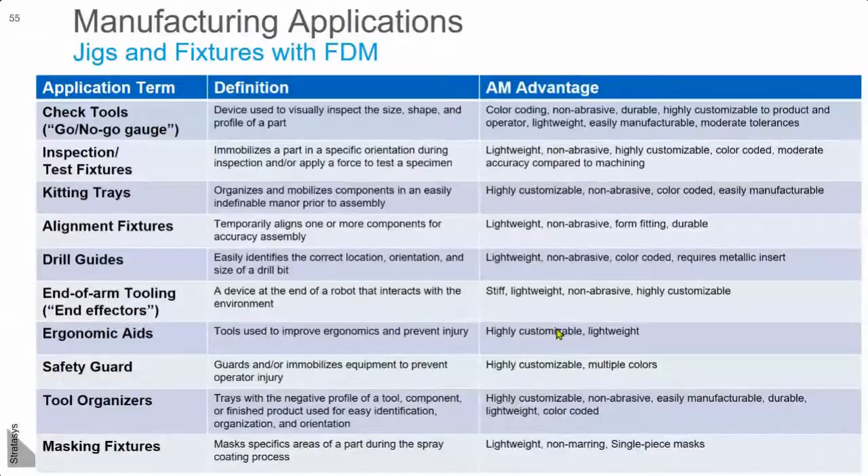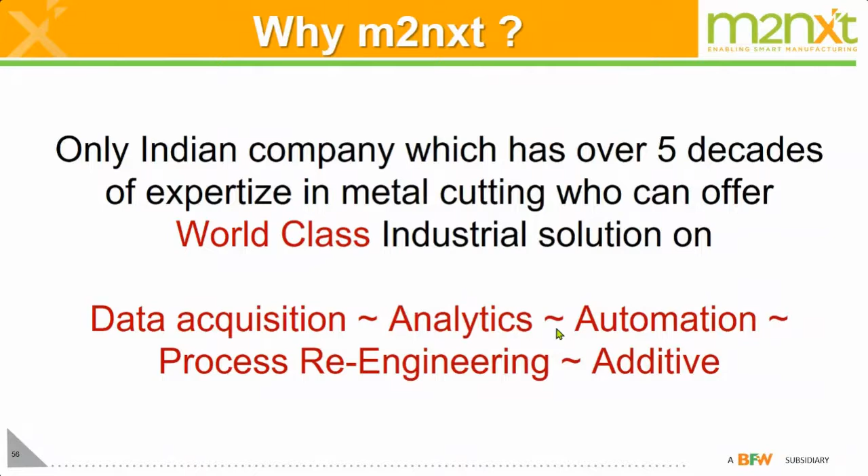So at the end of the presentation, why m2nxt? We are the only Indian company which has over 5 decades of expertise in metal cutting, who can offer world-class industrial solutions right from data acquisition to analytics to automation to process re-engineering to additive. So with that, I come to the end of the presentation. Let's boost productivity, performance, profitability.